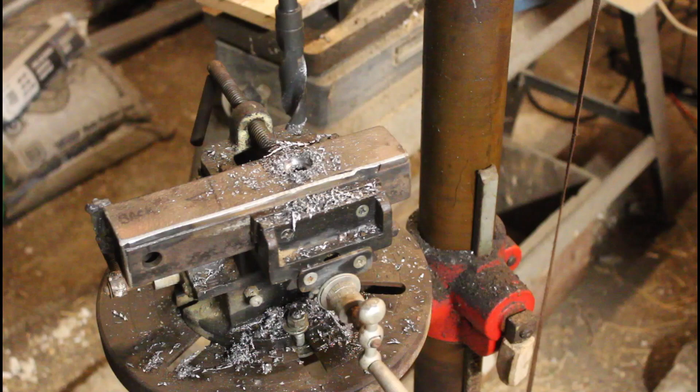Alright, now I'm going to draw a picture of the bottom of this truck.

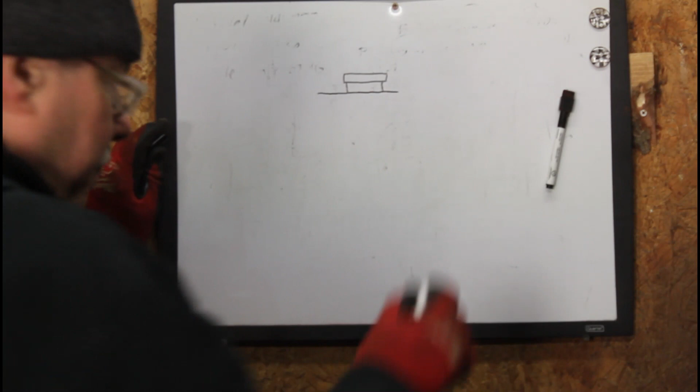Here is the receiver, and then it's got a small tube like that, and then it's got a metal plate, and here's two loops.

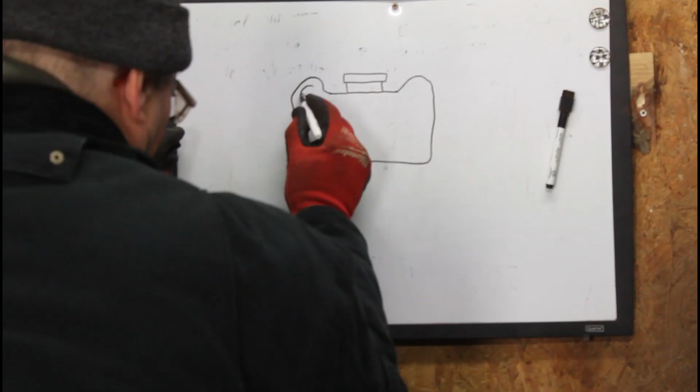And then these have holes in them. This is where you put your safety chains if you're pulling a trailer.

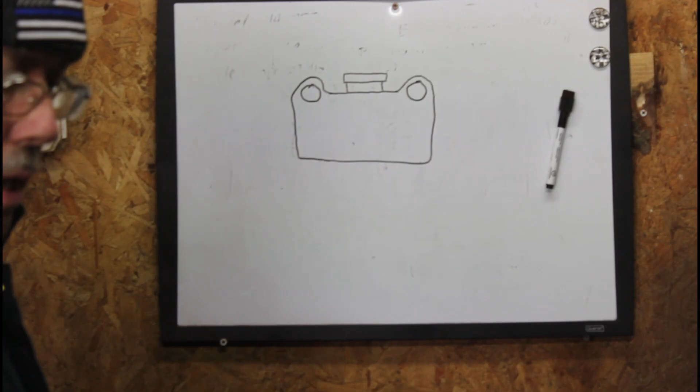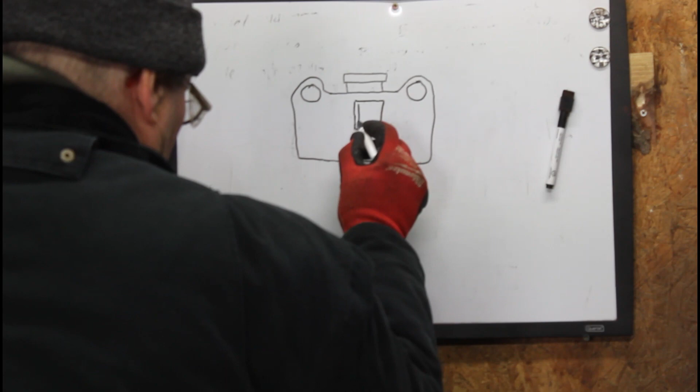Alright, now I've got 3 dimensions. On this side, here's the square that I welded onto the bottom.

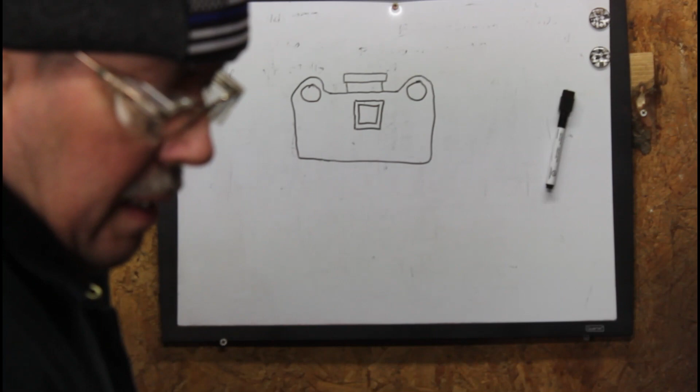Okay, on this side I've got 2 3/4.

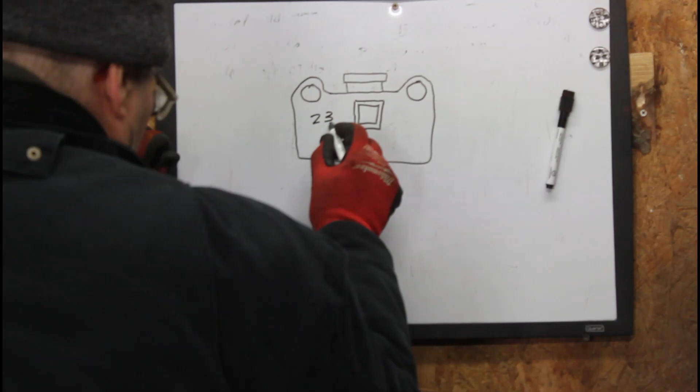And then on this side I've got 3 3/8.

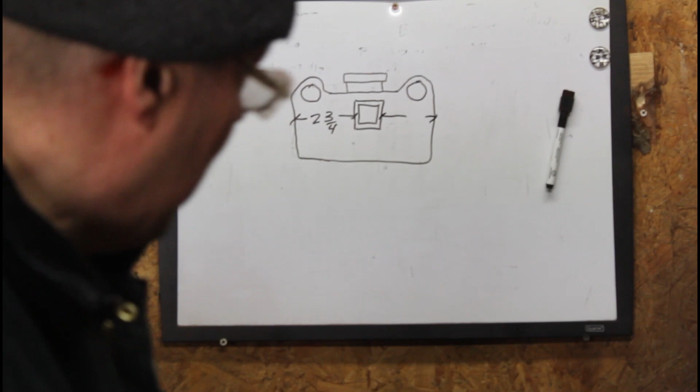Alright, now in the middle I've got 2 3/4.

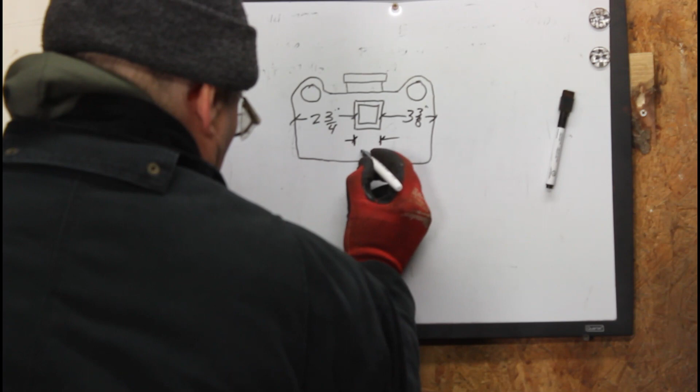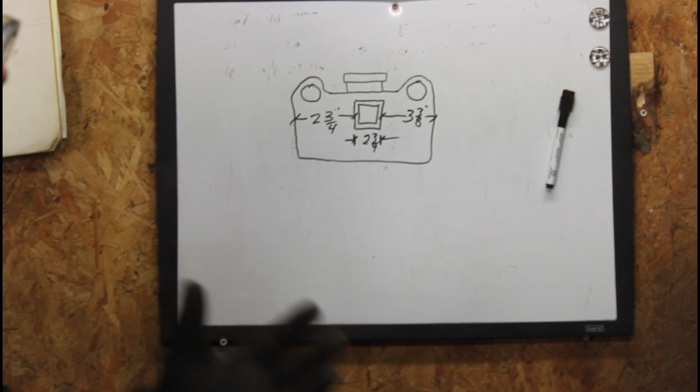Alright, how are you going to add all those fractions easily? Well, first of all, I'm going to change everything to eighths. Now, if you have different dimensions than this, you have to decide what the smallest amount you can change it to is.

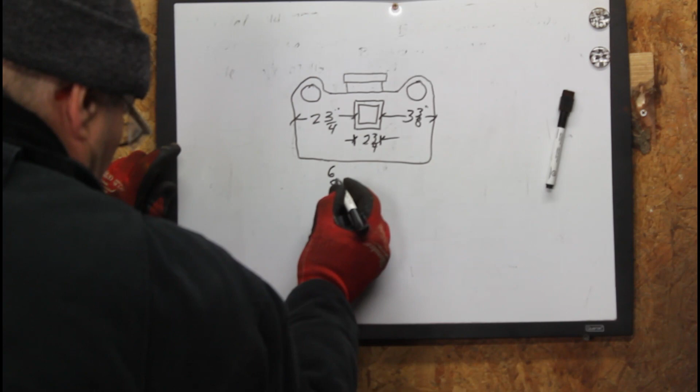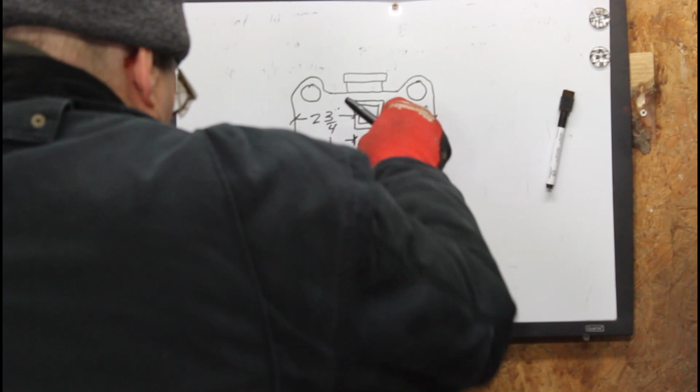Okay, now in this one I'm just going to total up all the fractions. That's the best way to do it. First of all, change this to 6/8. Now this should be 2 1/4. Let me change that. Two and 1/4.

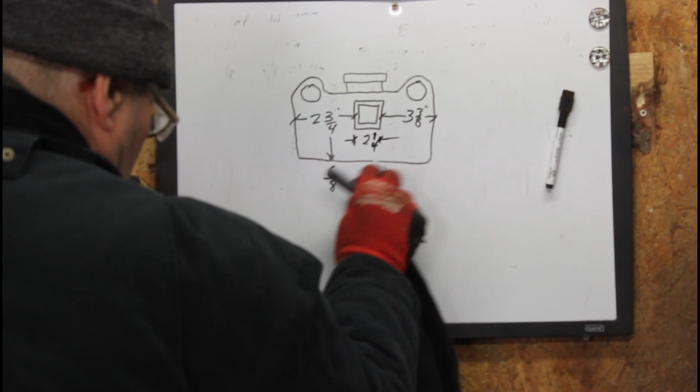Alright, so this instead would be 2/8. And then this one is 3/8. So that's 11/8.

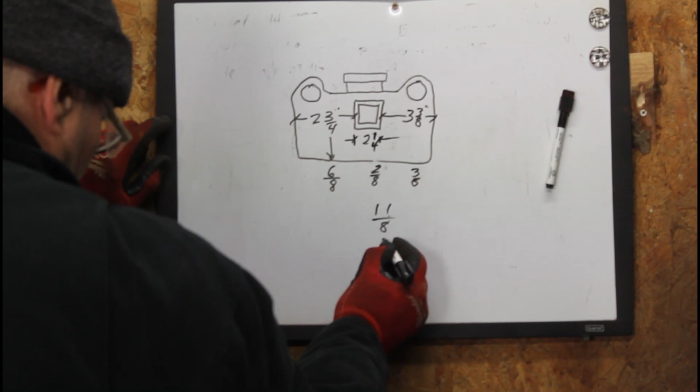So 8, 9, 10, 11. 11 minus 8 is 3. So that's 1 3/8, 1 3/8.

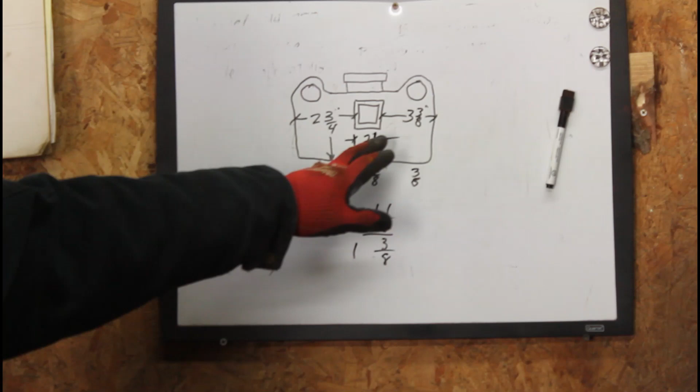Now you have to take these whole numbers and add those. There's 7. 2 plus 2 is 4. 5, 6, 7. So 7 plus 1 is 8. So you got 8 3/8 total.

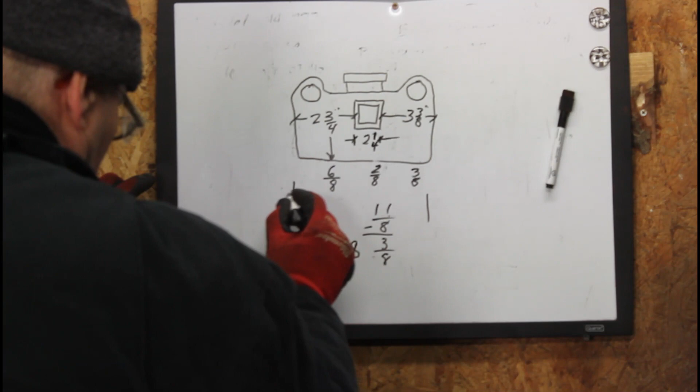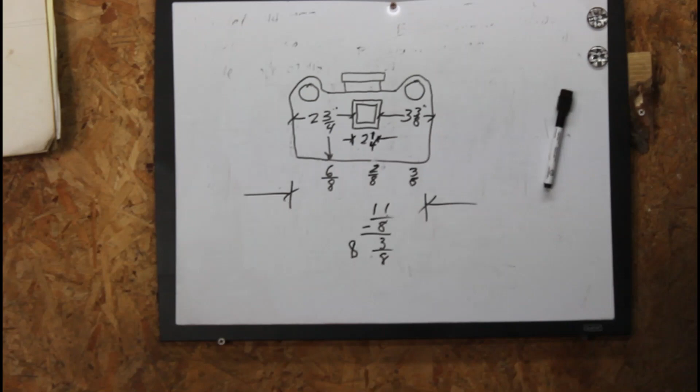So between these 2 points, this side and this side is 8 3/8. I want to find the center of this 8 3/8. If you want to find the center of 8 3/8, you're going to divide this in half, which would be 4, and divide this in half, be 3/16.

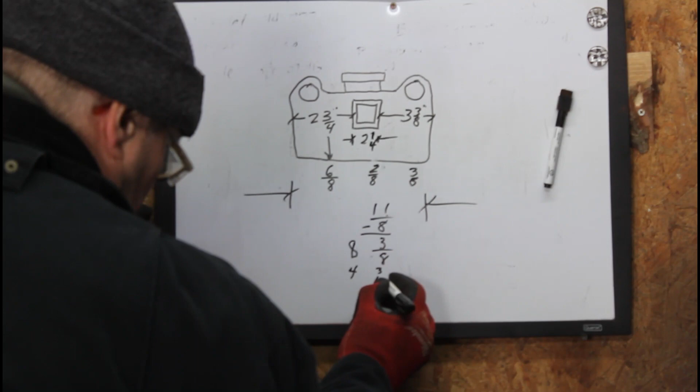So I want to try to find the center point of this whole thing. Okay, now what I want to do is get all of this rust off. There's quite a bit of rust, and then hopefully I will be able to paint it.

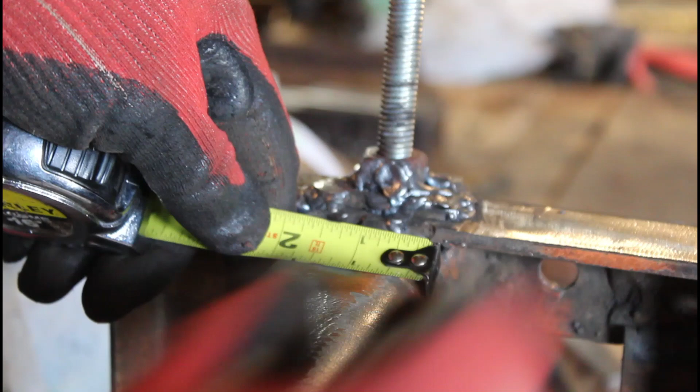Now I have to find out if this bolt or this threaded rod is in the center of this receiver right here. So it's about 1 7/8. So you come over

here about 1/2 inch. So it's 1 7/8. So you divide this in half. Mark your 1/2 inch and then come over 7/16.

About right there. Now all I have to do is sight down through here, and it looks like it's centered, so that's fine.

Alright, now the second part to this is the other receiver. This is the male receiver, and I want it like this.

Alright, and so if I center this, this is the female receiver. If I center this, it should be okay.

I have the top marked, and I also have an arrow marked right here. Right there is the arrow. Alright, so that has to match up with this arrow. This is the completion of the arrow. And this would actually be the top because this whole thing's upside down.

So all I would have to do is have it like this, and then this will be welded onto the truck.

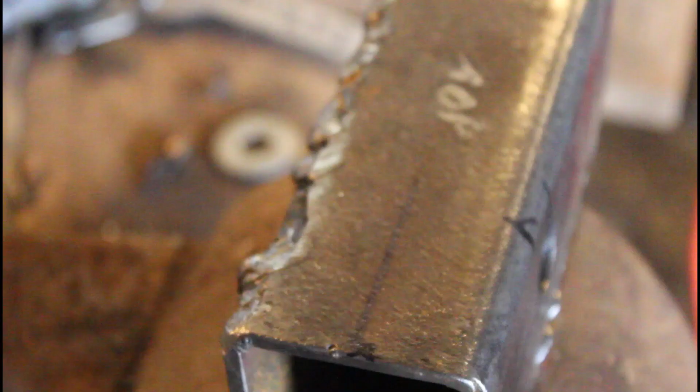Now I also marked a center line on this female receiver. Okay, I've got this lower receiver on there, and it looks like it's okay. Now we'll have to check it and put the other receiver on there, the two male receivers.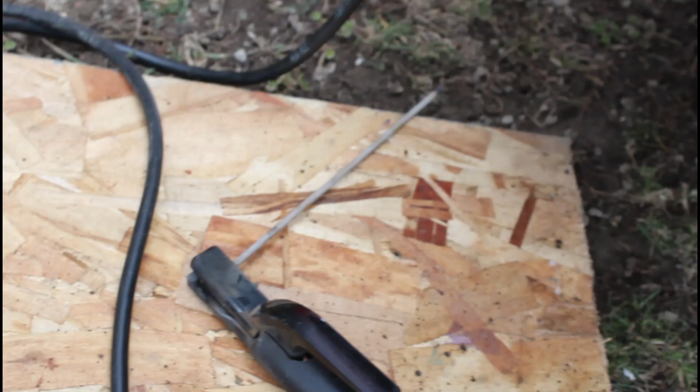Okay, well, I took these pins out, and they go in, but pretty hard. And now I'm going to see if it comes out okay. Okay, so that'll work. Well, I've got it welded partly right there, and so we'll try to finish it up.

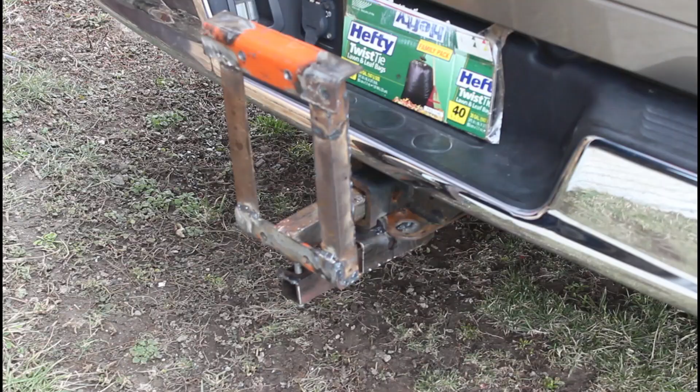Well, this goes on like I imagined it would, and the big test is going to be to see if these pins go in. These are both the same diameter.

Okay, well, there it is. All I got to do now is fill this area right in here with washers and nuts to make that work. That's all I got to do now. And this is going to be good enough.

And these plates that I made are going to hook on here, and then this will be able to, I'll be able to move the shaft that goes in here. I'll be able to move it up and down.

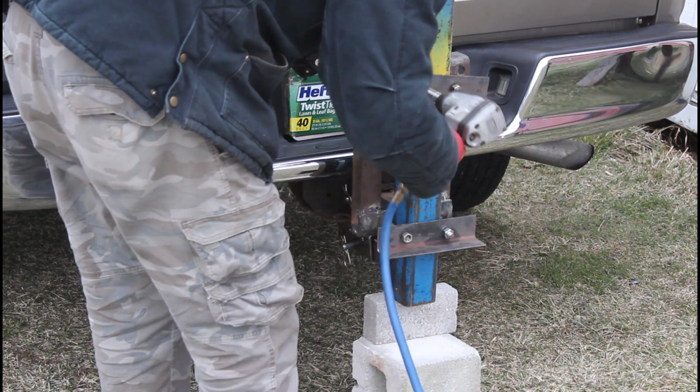Well, for this application, these are 3.5-inch bolts. They aren't going to work. So the lower one down there on this side of it, that's a 5-inch bolt, and I'm going to have to use all these washers.

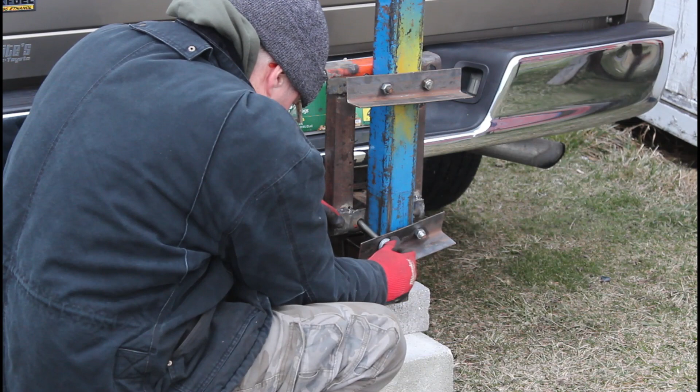Well, here shows the extended position, and it has a hydraulic jack in it, and if I want it to go down, there's a lever over there on that side, right over there, and I can let off some hydraulic pressure and lower the whole thing. Hopefully this will be okay so I can get my sander in.